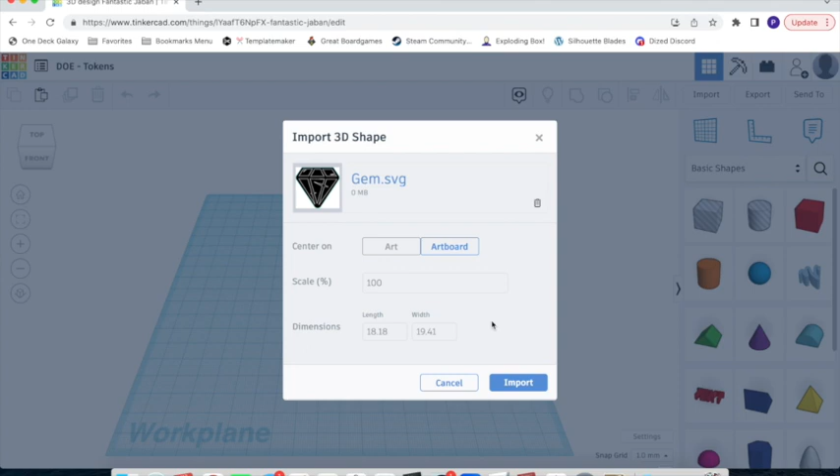Okay, now we're going to import, choose a file. Here we choose how big we want it to be. Because we did it exactly on top of the graphic from the rulebook, it should be a decent size. So let's just go ahead and import it.

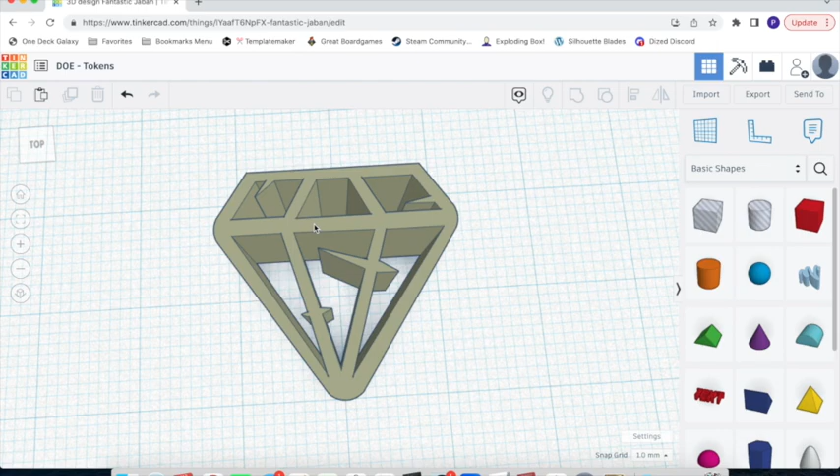And there we go, we see that we've imported the jewel. The only problem is everything that we traced has been cut out. That's because when we import the SVG file, we're importing the path, and right now the path is the outside plus six internal paths, so it kind of by default breaks everything apart. Unfortunately we can't ungroup it because it's an import, so it thinks that's exactly what we want. And hey, some of you might want to print that out and go for it.

It's not what I'm looking for, so to fix that, we need to go back into Inkscape and make a change. I'm going to select everything that's not the base, and instead of white, I'm going to make the outline red, so I can see it when I drag it off of the base.

Okay, so now we have all 6 pieces up here, and the base here. If I do the base again, I'm going to change the name to gem base. Let me make sure I'm in the right folder. Gem base, here we go. Now I select all of these, and we're going to call them gem details, so I can differentiate the two. So here we have the gem base, and the gem details.

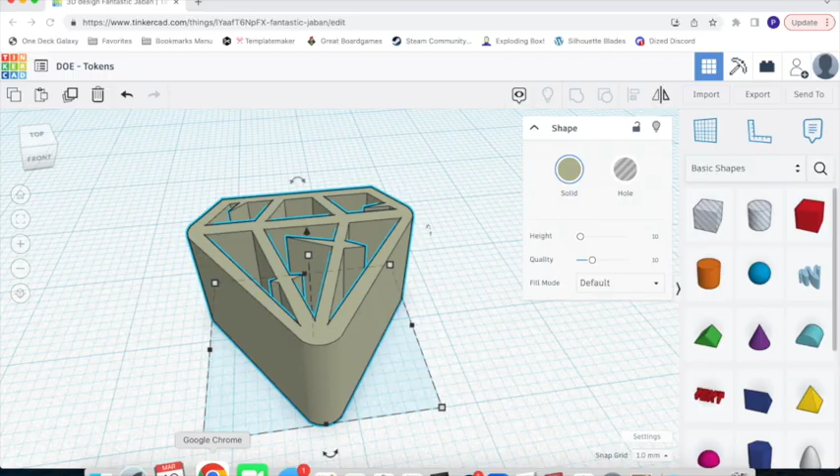Probably guessed what the next step is - we're going to go back into Tinkercad and import. Unfortunately, I haven't had much success importing more than one file, so let's import the base first. Now it's going to import it directly centered.

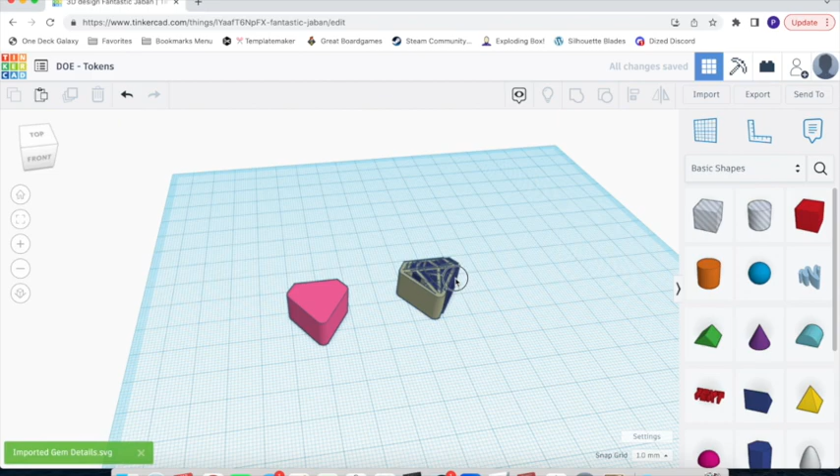There we go, and I want to import the details. So let's get those. Again, not changing any of the numbers keeps everything by default, and by default it imports it at 10 millimeters high and whatever size you created it. So let's select both of these, press F to zoom in on them, and now we're getting close to what I want to create.

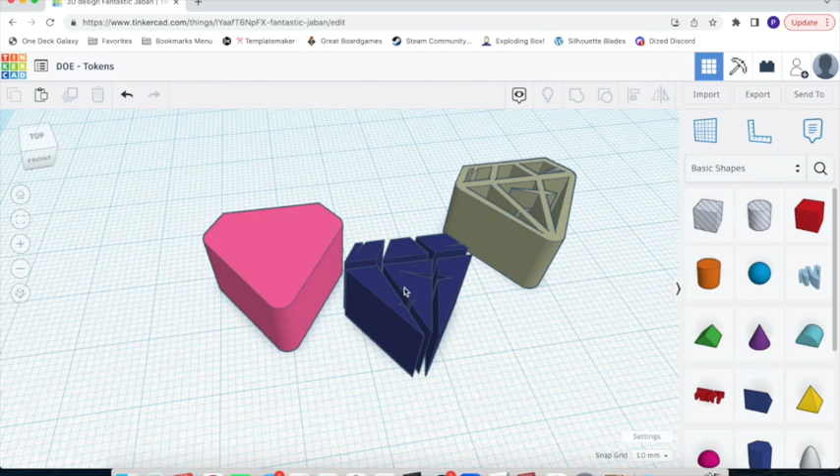So what I want to do is have a tiny little indent of this pattern. You need to bring it down as small as you can get it - I'd say about 1 millimeter - and line it up with this.

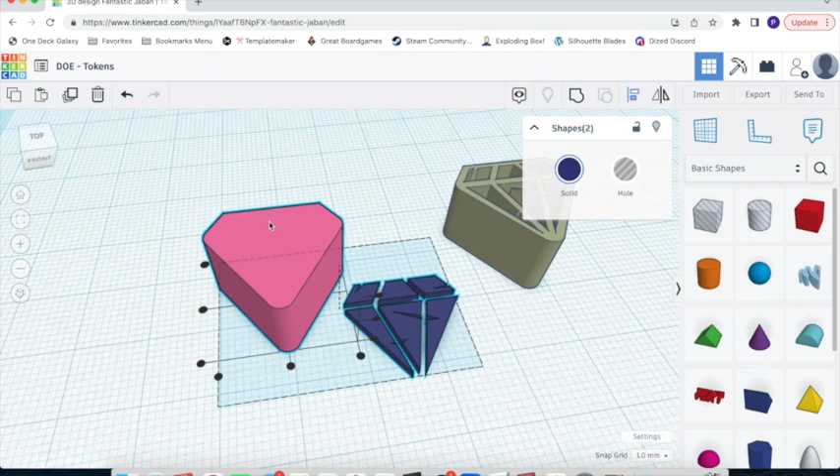I'm going to select both, press L for the alignment, and select the one I want to align it to. Now that I have the base selected, we're going to center it on the x-axis, then the y-axis. It's gone, but really it's underneath, so I want to bring it to the top layer - that's where I click here on the z-axis. Now it's centered on the top.

But as you can see, it's slightly off, so I'm going to try to fix it. Too much - okay, so we need to change the snap grid amount. I'm going to turn it off. Now I can move it exactly where I want. Let's go about there. That looks pretty centered.

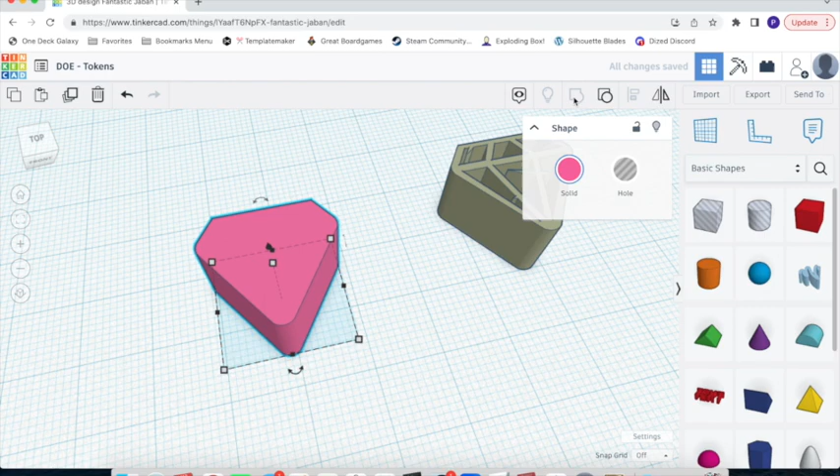Now, if we select the details and the base together and group them, the details disappear because the paths are fully overlapping. What we want to do is turn the details into a hole. If we click on hole, now when we group them, it's going to chip away or carve out the details. So now we have a textured token, and I think that looks incredible.

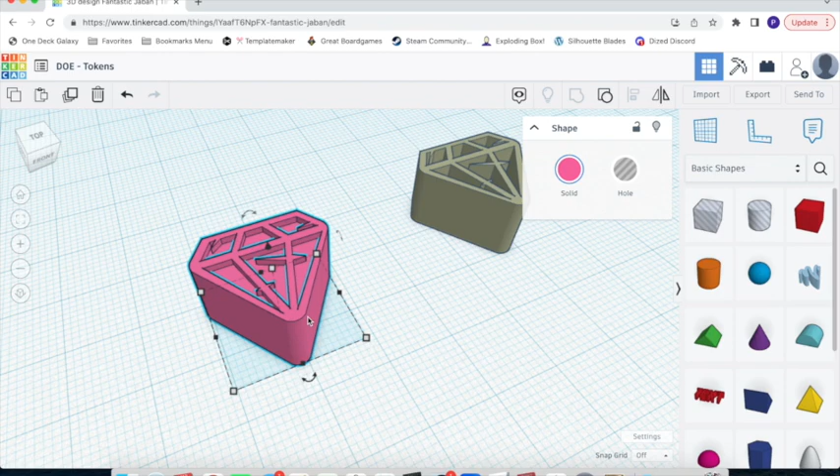You have to repeat this on both sides, which is kind of a pain, but super easy to do. So I'm going to ungroup them, take the details, duplicate it, select the details and the base, group them so it takes away that part. And now the base I need to flip.

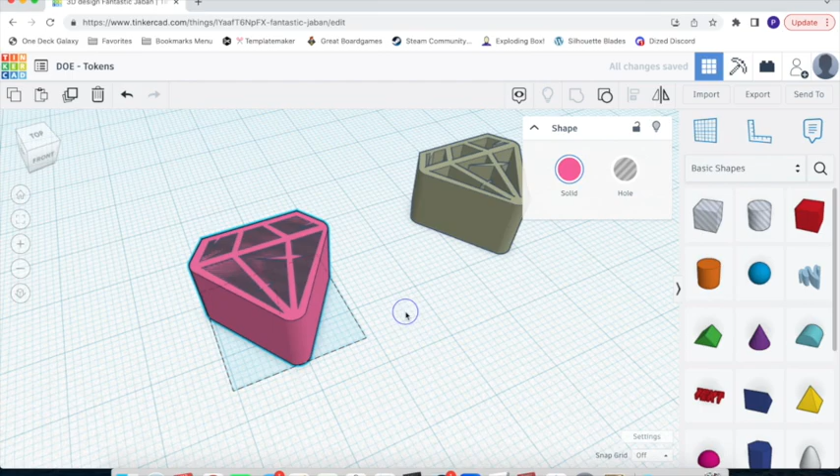So I'm going to click here, and this allows me to rotate it however many degrees I want. But if you bring your mouse down to this area, it snaps to a certain degree, so we're going to do 180 degrees so it flips fully. Now we double check that it's still sitting on the base, and you can see that part that's been cut out - the second details we created. Now if I group them, beautiful - we've got a token that has details on both sides.

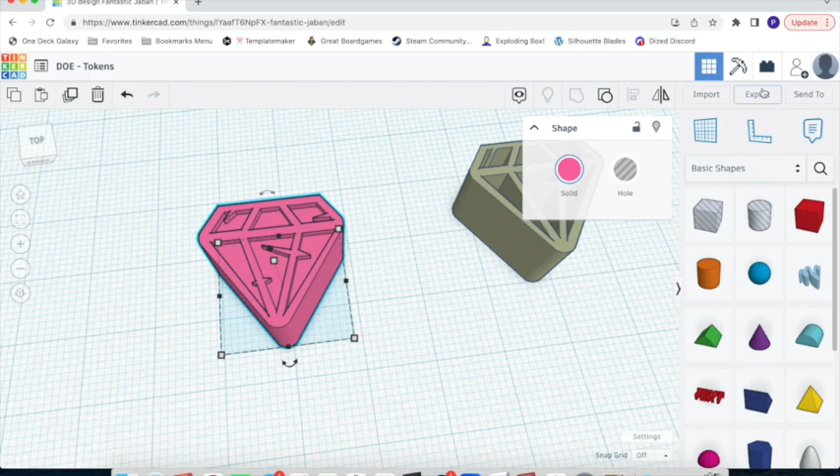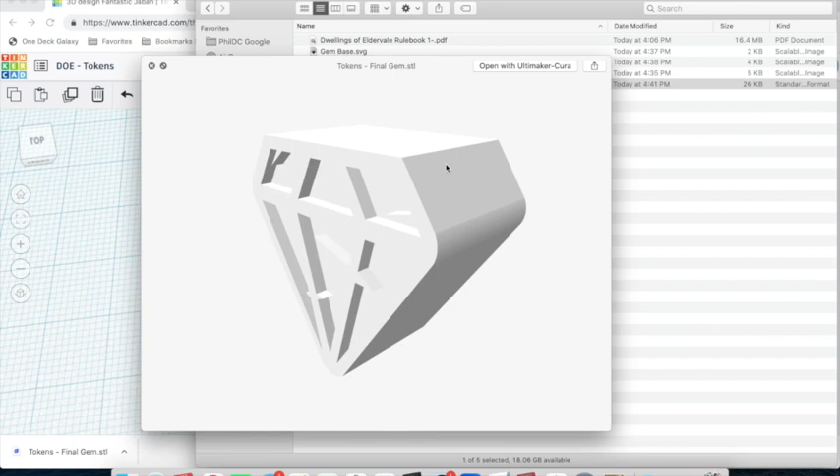Now you can send this or export it. So let's export this as an STL file, and I'm going to name this tokens final gem. Once you have your final gem file downloaded, you can preview it and see all of the glory on both sides.

All right, just like that - looks pretty awesome. We can then take this, import it into our 3D printing software, and print out a whole bunch of them.